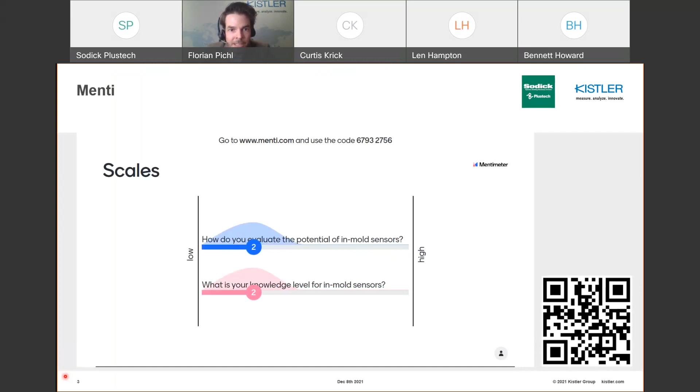Before we start, I would like to have one interaction with you. Here I have a small Menti code. Please scan the QR code and rate. What is your background? How do you evaluate in-mold sensors? Do you think it's useful? Do you think it's not useful? And the second question I would like to have is, what is your knowledge level for in-mold sensors? The easiest way is to take your smartphone, scan the QR code, and then you can easily submit it, or go to menti.com, enter the code 67932756, and then I will get some reply. In the end, I will share the results. This is just for me, to get a feeling if you already got in touch with it or not.

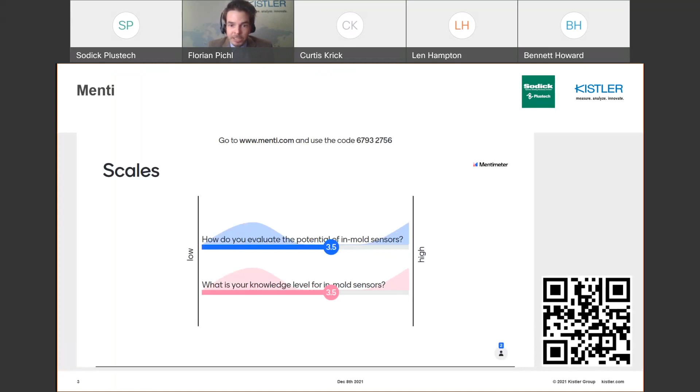So, where to start? We are still in the injection molding process, and I think the majority of you know what the job is. We have some materials, some granulate. We are using process equipment like an injection molding machine. We have different peripherals like cooling, handling, and so on. And we have an injection molding tool. And the primary goal is really to produce parts which fulfill the quality, but also have a very good compromise between production costs and the achieved quality.

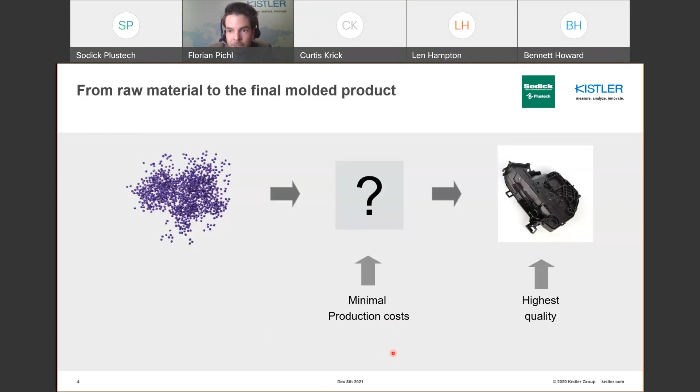In this picture, there are not so many items illustrated, but here you can see different interactions. On the right side, you have your customer. He is requesting the highest possible quality. You are also in contact with your quality department. And in the middle, you have the shop floor, and the shop floor is targeted to keep the production costs very low. This is your internal view.

In the past weeks, months, as well as years, there were also external factors driving your production. I'm currently not 100% sure about North America. Currently in Europe, we are facing a lot of environmental awareness. We have new regulations forcing us to integrate regrind material into the product. That means the process will get a little bit unstable compared to virgin material. If you are an injection molder for medical devices, you have a very regulatory landscape. You have the FDA, you have the new MDR, which is also requesting more documentation, more items.

But you also have some new trends which came up in the last year. That means with digitization, with interconnected devices, you're trying to save money. And this is a really, really challenging environment where you have to compete and have to at least fulfill your business processes. How a process can be monitored can be clearly seen here.

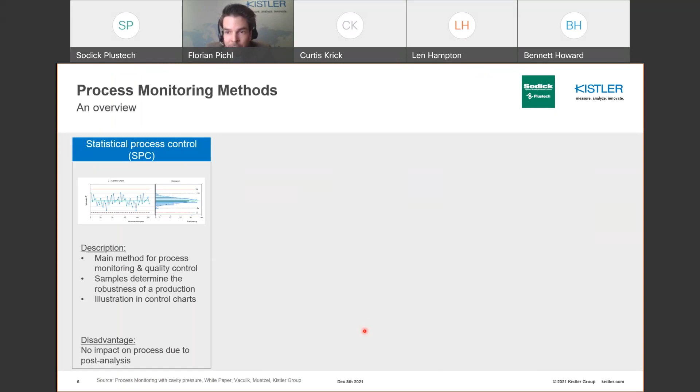Here, I'm collecting 4 different methods for how an injection mold can be monitored. The most classical one is the so-called statistical process control. It's the most common one. You are producing, you are taking out parts, you're doing the measurements, and then you're collecting the data in a control chart. To mention one disadvantage, sometimes it's happening after your production. And if you realize some days after the production, when the mold is dismounted, that you have a very high scrap rate, then you cannot fulfill your customer orders.

Another one, which is also very common, is to monitor specific machine parameters. It's a very common, very classical approach. To mention one disadvantage, you get a lot of information from the machine, from your process, but one item is still missing. It's the information out of the cavity, directly where the part is created. And this is the starting point where I'm jumping in, or different other suppliers.

We have here so-called cavity pressure sensors, which are directly integrated into the mold. You are monitoring the processes, and you get direct information also for high cavity molds. One disadvantage to mention is that you need additional investment for the measuring chain.

Last but not least, this is a combination of machine parameters, process data like cavity pressure, and some mathematics. With the combination and linkage between machine, cavity, as well as quality data, you are creating so-called mathematical process models or quality models. To mention one disadvantage, it takes time, because the basis is a design of experiments which needs to be done. And as you know, having different steps, this takes time, and it's very expensive, but it can be found very often in the medical industry.

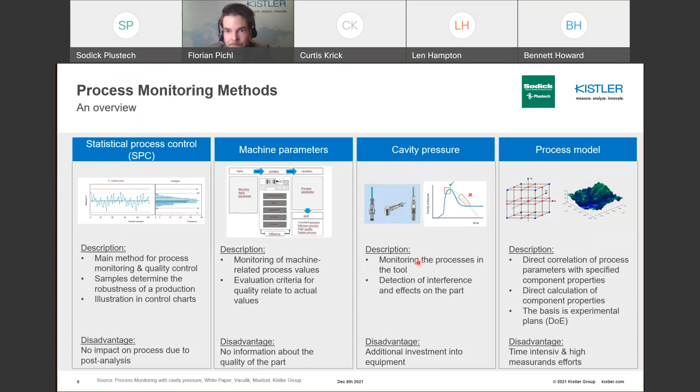In between, you also have to focus on, is my tool capable of producing the parts? And is my process capable of it? Classically, you're not only having one process or process setting, you are having a process window. And with a different process window, you also get the same question about, is my tool capable? Is my process capable? And what will be the resulting outcome?

Another information which can be taken out of this approach is that for each cycle, you can have a look on how balanced is my mold. That means how to answer the question, is my tool capable? Do I have any internal or external effects affecting the molding approach?

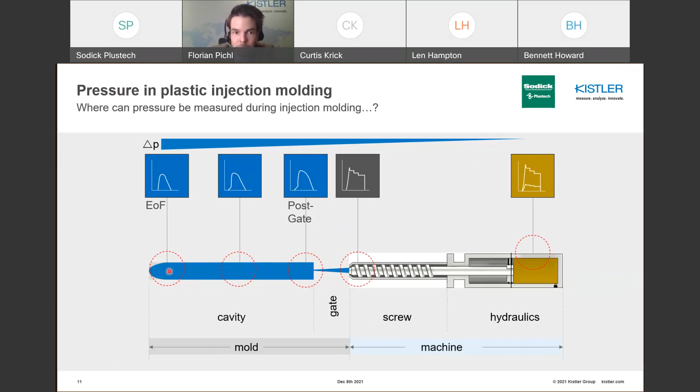When we talk about cavity pressure itself, why is cavity pressure so important?

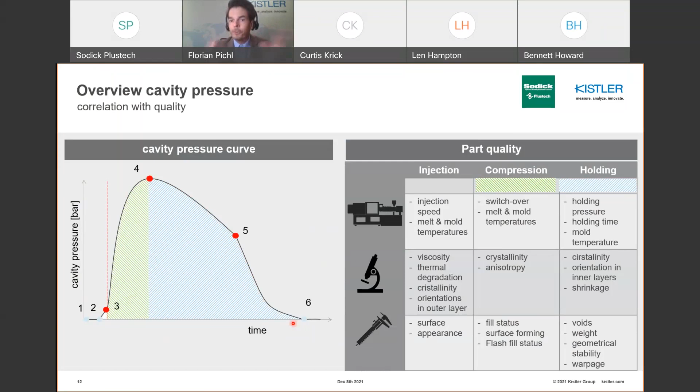This phase is mainly responsible for weight stability and geometrical stability, but also the length of the holding phase will have a direct impact on your part quality, because if you're ejecting the part too warm, you will have some inner tensions, some inhomogeneous cooling, which will finally lead to warpage of your part. This is information you get for your process, but also for your quality.

If I look at the impact of different machine parameters, I think you also know that for an injection molding process, you have different machine parameters like injection speed, temperatures for the hot runner and the mold, different pressure levels, the holding pressure, the back pressure, as well as the temperature for the barrel. And all of these machine parameters can be visualized with cavity pressure. Temperatures change the viscosity, and a change in viscosity will also change the pressure curve. Changes will shift the pressure curves to higher or lower levels.

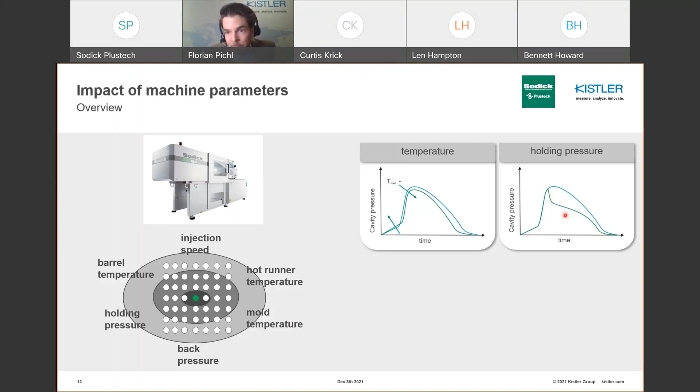Another item which can be made visible is the holding pressure. If you look at both graphs, you see that the blue one has a higher level and the green one a lower level. And if you remember the previous slide, where I stated that the holding phase is responsible for geometrical stability and weight stability, you can assume that the part for the green line will differ compared to the blue one. In the worst case, it's not fulfilling the specifications for weight, and there might also be a high risk of voids in the parts.

Another item is the injection speed. You see here that with higher injection speed, you are filling faster and changing the curve profile. This can be clearly seen. You also see information about an optimal switchover point, which can be derived from this, but you can also get information about the maximum pressure, which can then be correlated with the clamping force and so on.

And last but not least, the last one is the switchover. When you change the injection speed, you should also have a look at the switchover point. If you have a higher injection speed, then you should also adapt the position of the switchover accordingly.

In the worst case, what could happen is that switchover comes too late. Then there might be a risk that you're overpacking the mold, you're damaging the mold. And when the switchover comes too early, then you are not having a full cavity. The holding phase cannot compensate the shrinkage, and you will have some geometrical deviations for the part quality.

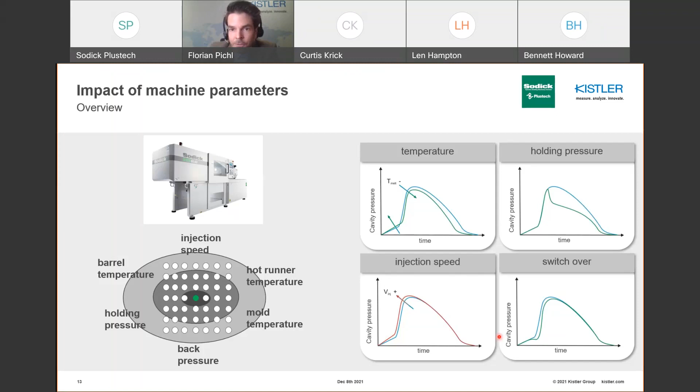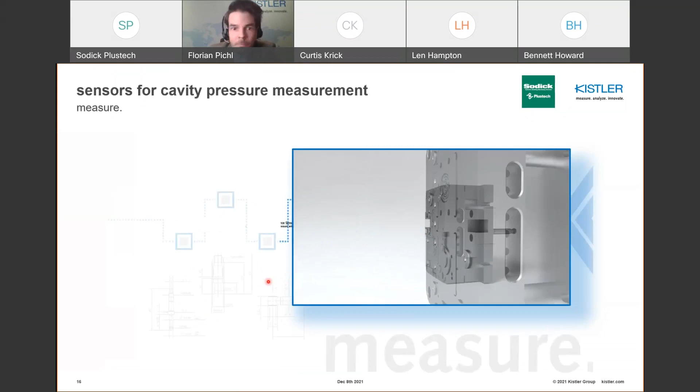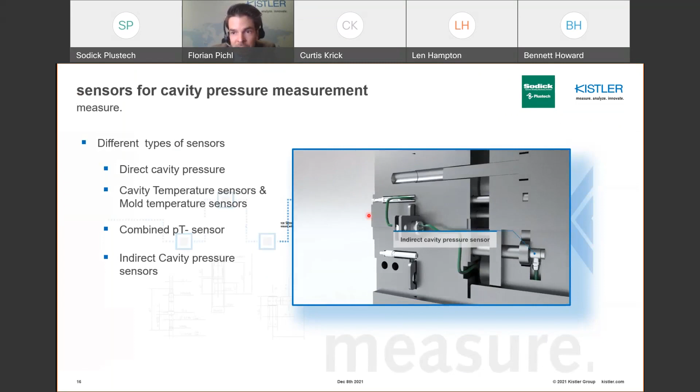Talking about different sensor types, we have direct sensors and indirect sensors. The direct one can measure both pressure and temperature. The indirect sensors can be placed behind an ejector pin. This is one classical, very common approach. But we as Kistler also have a third variant, which is a so-called contact-free measurement. Here you can place the sensor directly behind the cavity wall, which can then be used for optical parts. Over the deflection of the wall, you can measure with the same principle as when you're using a direct cavity pressure sensor.

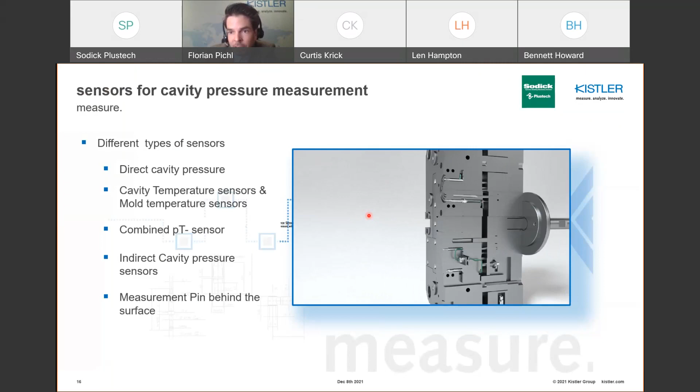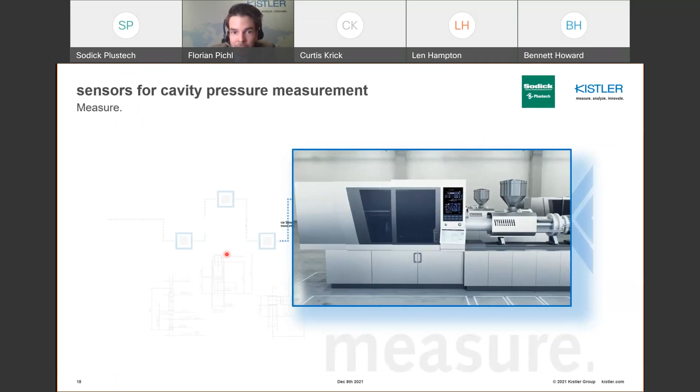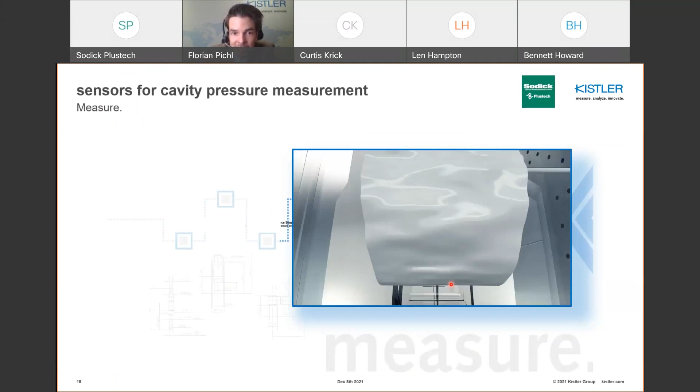Where can cavity pressure sensors be applied? Here I have another video, and this nicely describes what can be seen. You have here the mold in the heart of the injection molding machine. You have a data acquisition system. The melt is entering, the cavity is filled, the transducers are recording it. You have real-time monitoring of the in-mold cavity pressure, and can directly derive information about what's happening directly in the mold.

One of the benefits is really that it's not R&D anymore. It's really common in serial production. You can get 100% process monitoring, and you can easily get the data for the machine with a charge amplifier or appropriate process monitoring devices, which is illustrated here. And here you have our process monitoring device, the so-called ComoNeo.

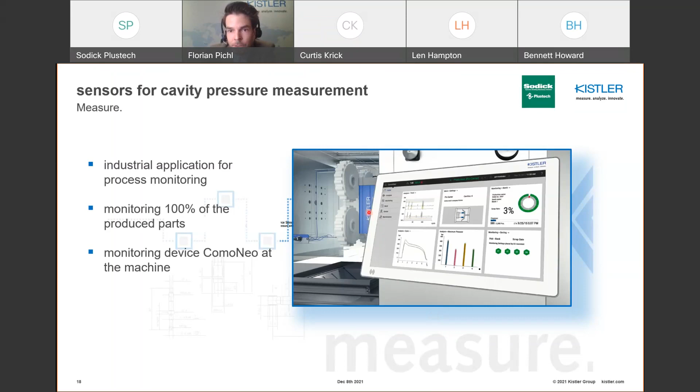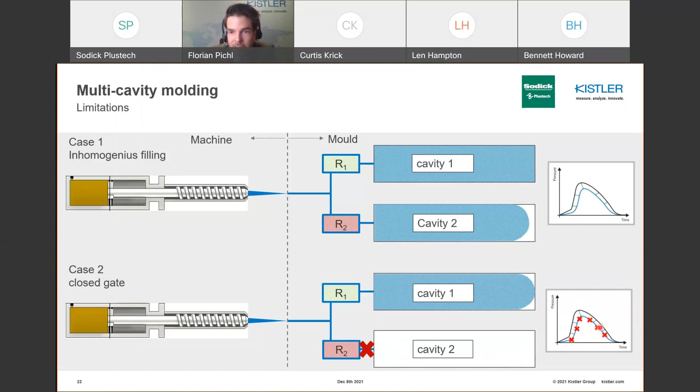This is one approach, but there are also tools on the market where you can use the different information and the review information: what needs to be done if you have to change the steel again. For example, we also have one software which is calculating, based on the recorded data, what needs to be done, and this can be directly matched with the part quality.

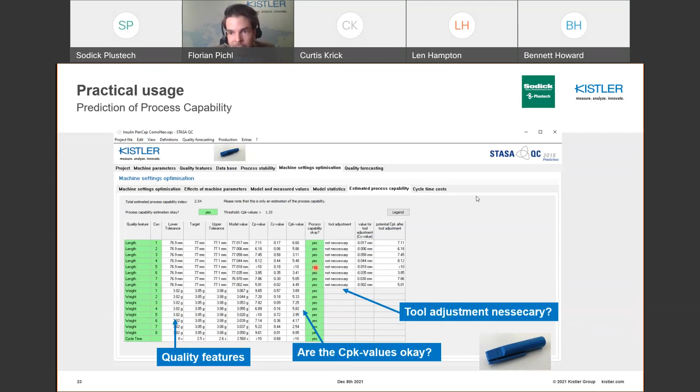What you can see here is a tool capability run. We recorded the quality attributes, we recorded the machine process data, we measured the data, and based on the created data, we could give an estimation which cavity needs to be improved to have a stable mold for your final production.

How can it be used for process baselining or reference curves? This is the next item. This is one practical showcase on the right side right now. You can imagine that if you have a mold maker or a different supplier who is setting up the process, the mold at plant number A, he's using a different machine, different settings. And then you are relocating the mold to your final production plant. You are not having the same machine, or even if you have the same machine, you will have some deviations.

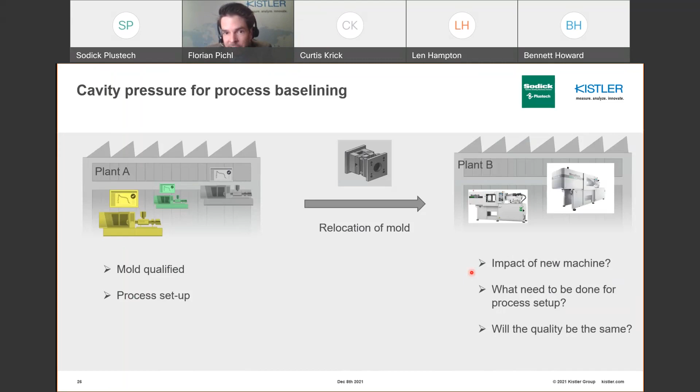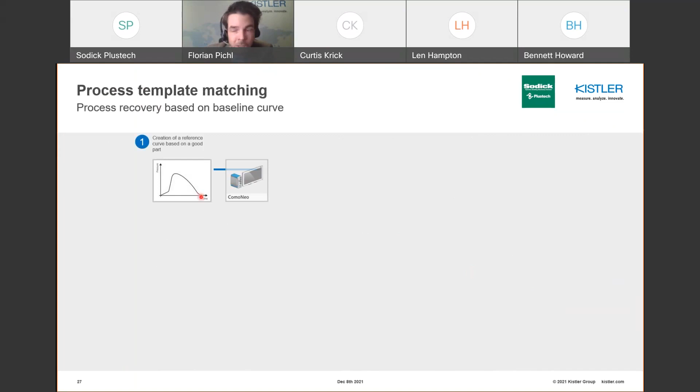The big challenge here is really what needs to be done to find a stable process again. And here cavity pressure can be used to come back to your process settings quite easily. And this is done like this. At plant A, you have recorded your reference curve, your process is stable, the parts are okay. You are recording here the reference curve, the cavity pressure curve. You're transferring the mold, you're recording on the new machine. You can see deviations coming. The root causes can be various: machine, different geometries, temperatures. But with the help of the cavity pressure curve, you can take this curve and transfer the process quite easily.

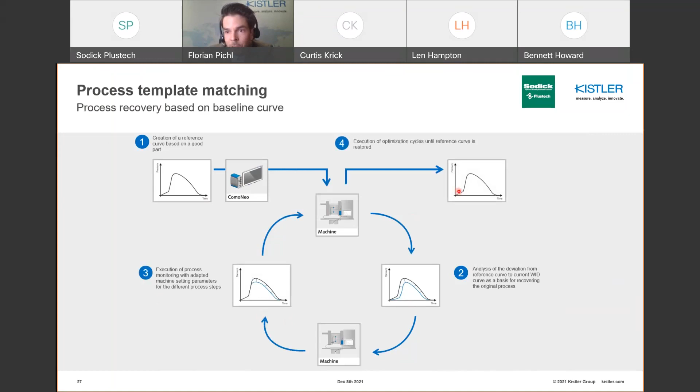How is this done? You analyze each phase of your injection molding cycle. You have a look at the injection phase. You're adjusting the injection speed. You're adjusting the switchover point. You have a look at the set holding pressure, back pressure, end time. And your approach will be done iteratively to find and to match the curve over the different cycles. And you will achieve this curve after different steps. And your goal is that at the new plant, at the new machine, the cavity pressure curve will be on the same level like you have created at the different supplier at the different location.

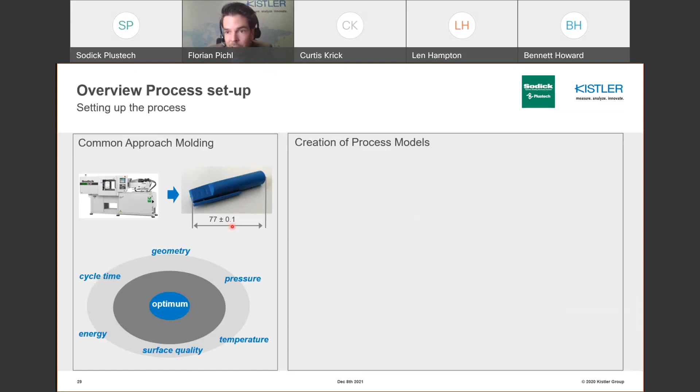How to use cavity pressure for the process development and optimal working point. The classical common approach, which is common, is to do it trial and error. You get the machine, you set it up, you use the different machine properties, set it up, and then find a stable process. A different approach can be done with so-called process models.

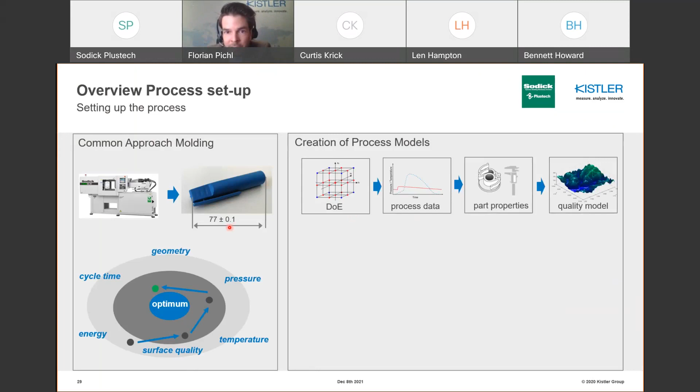Here you are using design of experiments. You are fully analyzing the process room with the help of the cavity pressure sensors. You're collecting the data. You are collecting the part properties, creating the quality model. And with the help of this, you can create neural networks, and this can be then finally used for the optimum working point. This is the same picture from the previous slide. Imagine if you change injection speed, switchover point, all the different elements I have recorded here for one setting can be made visible.

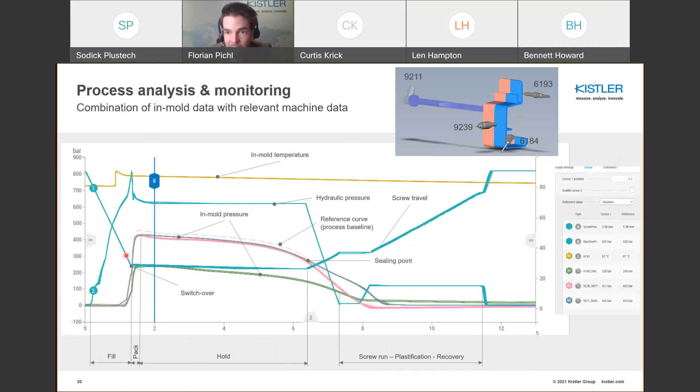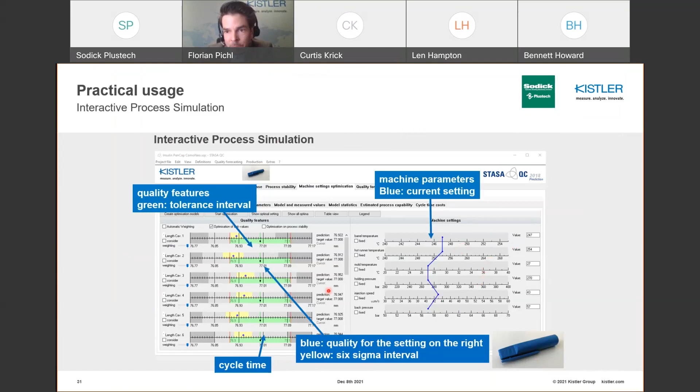When I'm talking about the working point, you have the potential to use statistical models where you can run simulations. On the right, you can use the set machine parameters. You can change the set parameters, and with the correlated and derived information, you can estimate what might be the impact on my part quality on the left.

For example, here I changed the holding pressure. And if you look at the points with higher holding pressure, you have a higher compensation of the volumetric shrinkage, and you will have a more or less stable process, which is then resulting in stable part quality.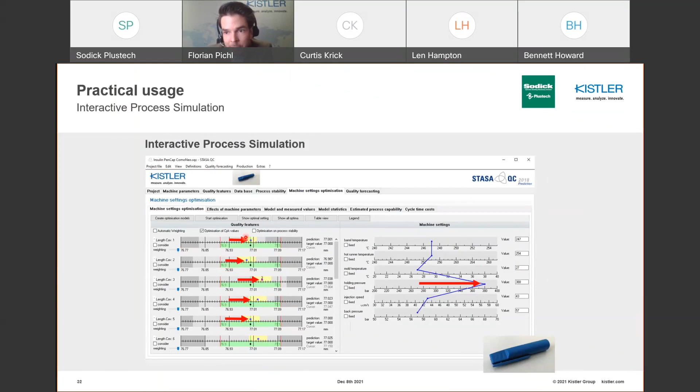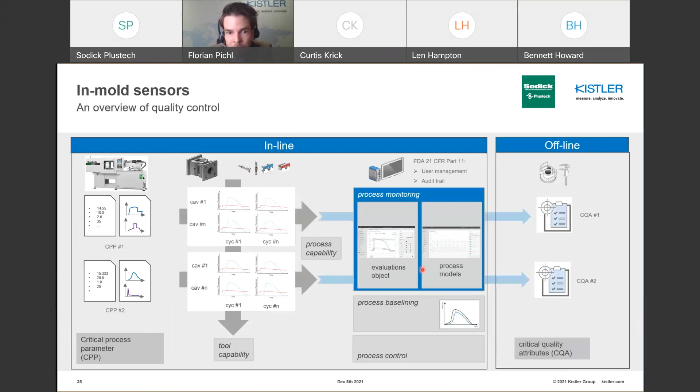How can it be used for process monitoring? This is a different approach. Here you can use different evaluation objects, envelope curves, as well as process models. The video nicely illustrates how it is applied. You see here the recording of the cavity pressure curve.

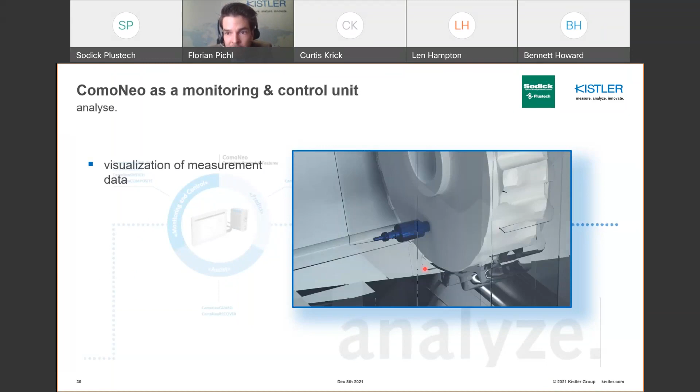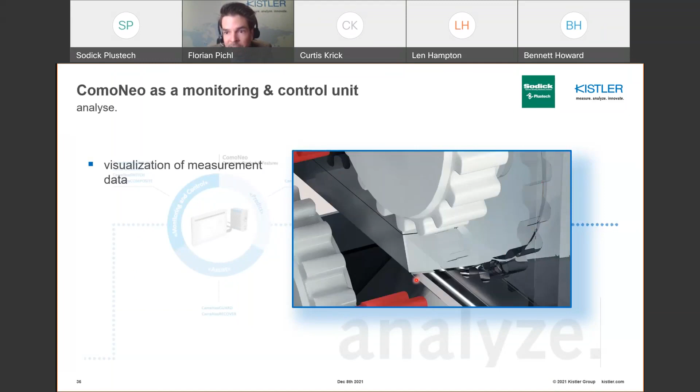Systems are monitoring the cavity pressure directly in the process, in the cycle, with these boxes. And with the height and the adjustment of the boxes, you get the information if my part is stable or not. Here you have one example where 2 cavities were not reaching the allowed pressure level, and a sophisticated monitoring device automatically gives a signal to the machine so that the parts will be automatically separated and scrapped.

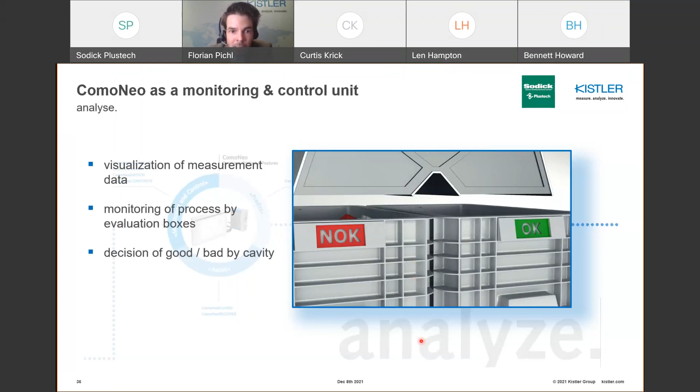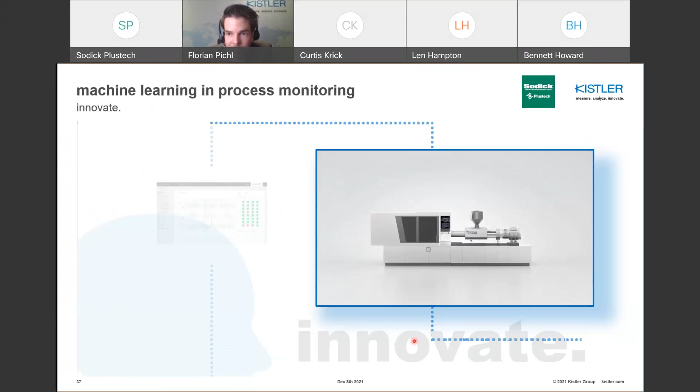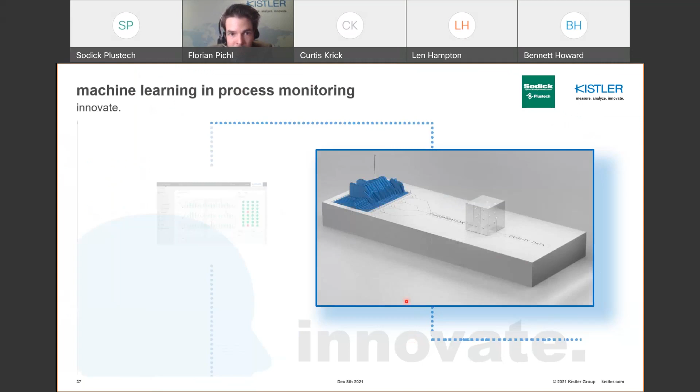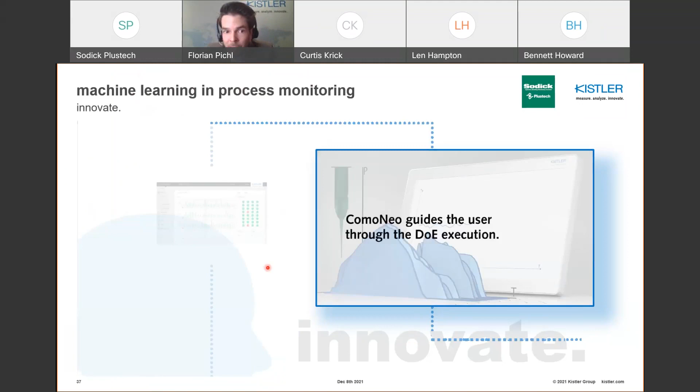Another item which I would like to introduce, and this is a little bit referring to the title, How to Drive Innovation. And this can be seen here with process models. You can integrate this sophisticated process data into machine learning. You can create process models with different heights and values. You can record it. Each of the different cavity pressure curves has an impact on the part quality. This can also be directly done with the process monitoring devices.

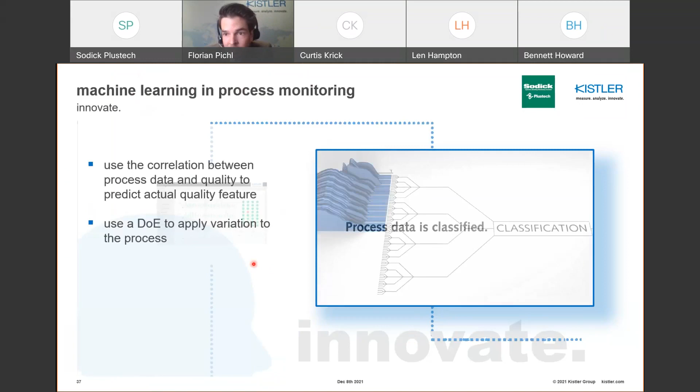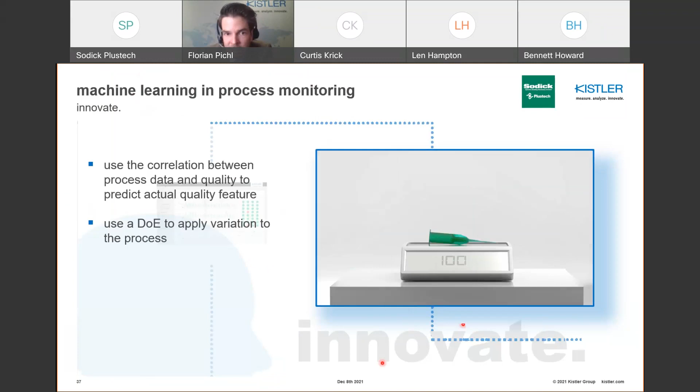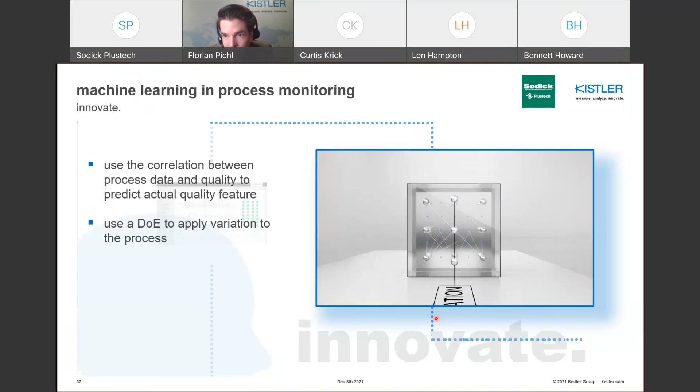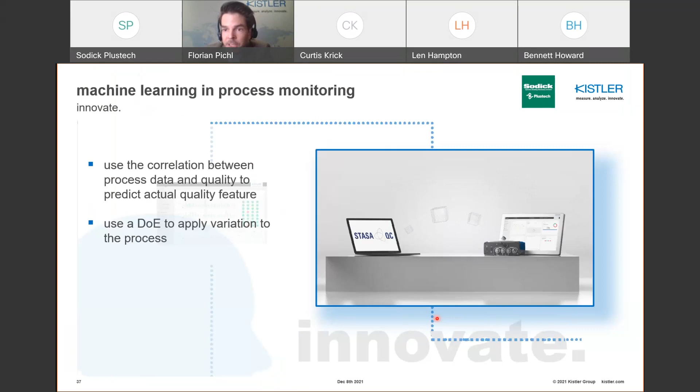In real time, processes are classified afterwards because you're doing the measurement for each cycle, for each DOE. You're measuring the items, and then you're creating the mathematical models. And with the help of the classification, you are really capable of driving innovation at your shop floor, because with this information you can generate prediction models based on artificial neural networks, and this helps you to do simulations, to do process analysis, but also to improve the process with this optimized database.

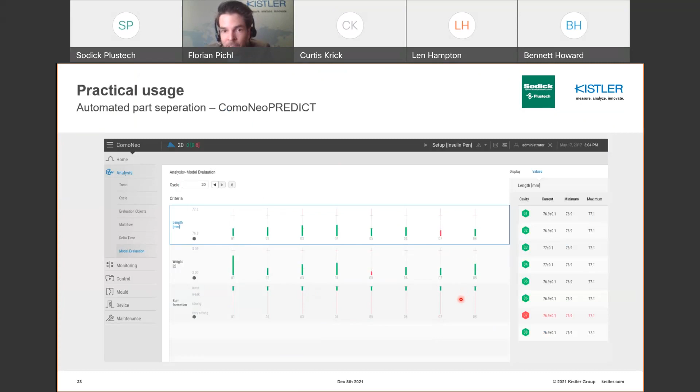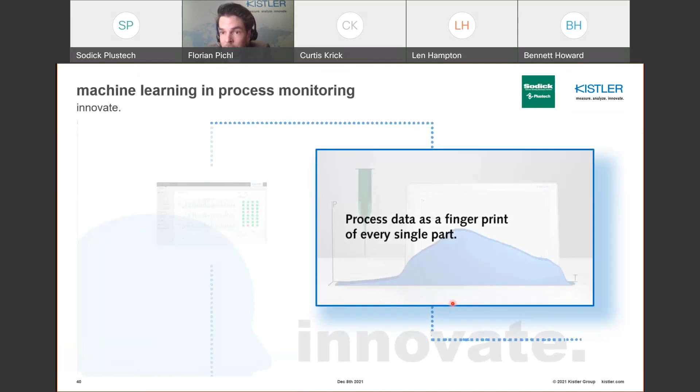In real time, this would be the graphical user interface for our device. Here we have different part qualities, and what can be derived right now. You're not getting only the information if the part is good or bad, but you also get a quality documentation. And the quality documentation can then finally be used for batch release, your supplier or customer documentation.

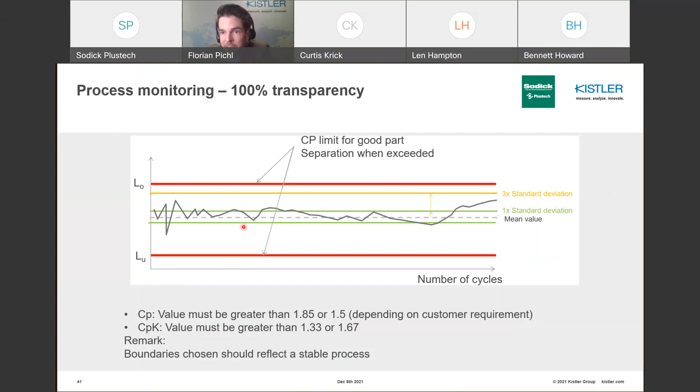All the data that we are generating with cavity pressure are stored. You are not only doing a cycle view, you can get information over your whole production time. That means, for example, if you have a night shift and you don't know what happened in the night shift, have a look in your historical data, have a look at the different phases, and you can clearly see if something went wrong, something was changed. And this is really reducing the risk that bad parts will be sent to the final customer.

Another item is a little bit talking about material efficiency. When you do the process monitoring, you have the analysis, you can detect variations in material, in process, in temperatures, in human handling. You can analyze this, you can detect it, and in combination with process control, you can also derive material efficiency. Because how is material efficiency defined? On the one hand, it's a reduction of scrap. On the other, it's an incorporation of used material.

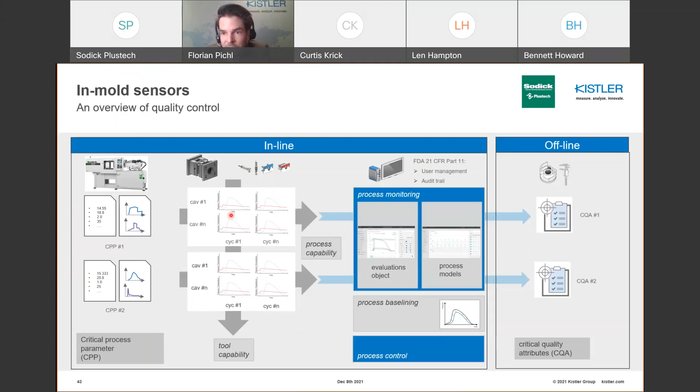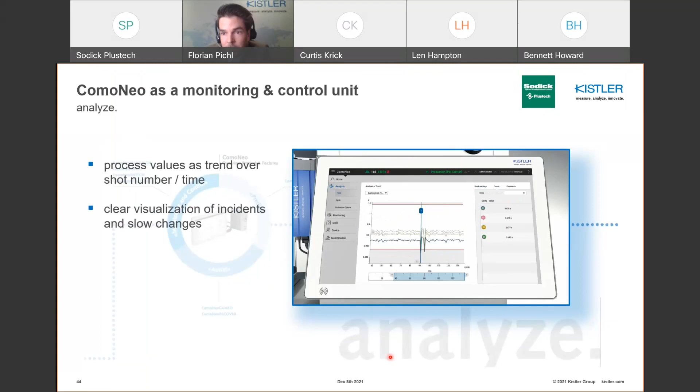And with the combination of advanced monitoring devices, in-mold data, and machine data, you're capable of addressing this question quite easily. How is this done? It can be seen in this video. You're monitoring the deviations right now. Changes in material and the process can be detected automatically. That means your shop floor can take actions right now, but you also have the chance that parts will be automatically separated if parts are not in the defined range and in the specification.

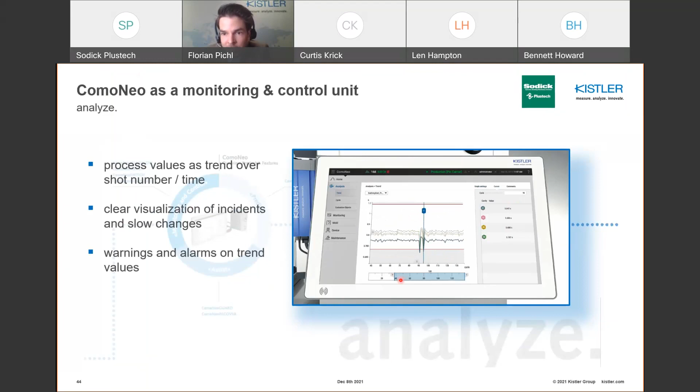And this is then also the starting point talking about the control. Here I would like to have a short view on the switchover control based on cavity pressure. Each machine is really capable of doing the switchover individually, but this is classically done by screw travel. But imagine if you have the information from each cavity and you know that you would like to do the switchover at a certain pressure level, why not use the in-mold data to send it back to the machine, so that at a certain pressure level, which should be reached for each cavity, the machine will automatically do the switchover. And this is again illustrated here.

This is also the picture that I showed initially. Case number 1, you have a slight deviation. You can imagine that the pressure level is on the same level. You can easily apply a pressure threshold, so that if you reach this pressure threshold at cavity number 1, do the switchover, or you can also generate a forced switchover if the cavity is full.

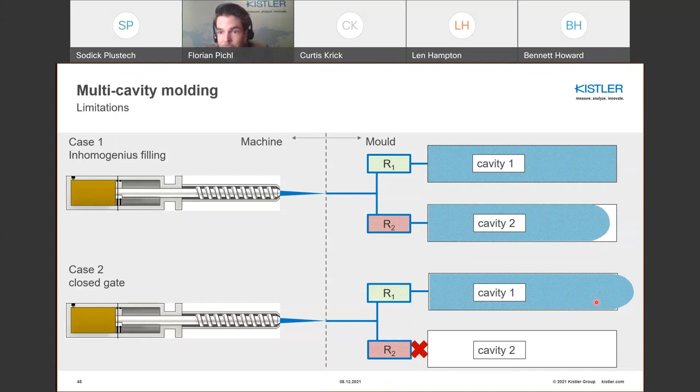This is really the benefit of protecting the mold. By protecting the mold, in case number 2, this can be seen quite easily. Gate number 2 is broken, no melt is entering. In the worst case, you're overpacking cavity number 1, you're generating flashes, you're generating plastic deformation of the steel, and this is really not wished.

How can this be applied? Like here, I mentioned pressure level. Here I have different application examples of how it can be applied. For a 4-cavity mold, you can easily execute the switchover based on cavity pressure by one single channel, all channels, or a combination. The combination you have seen in previous slides, where you know at which cavity the pressure is reached latest, but you also have the combination with enforced trigger when you apply the cavity pressure approach for the cavity where there is a high risk of overpacking.

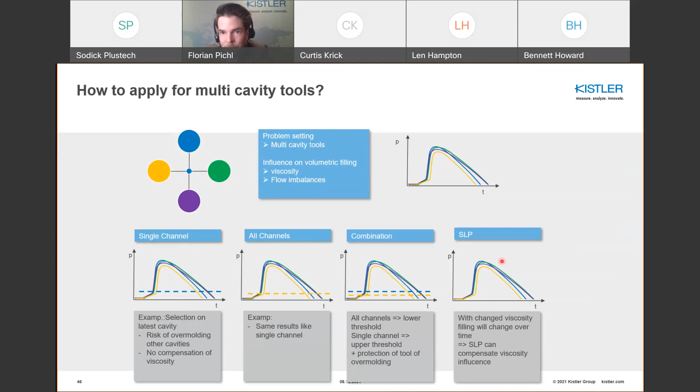You also have automatic algorithm controls, which can be found on the machines or in sophisticated process monitoring devices. And with a combination of this, you can also generate some benefits. Here we also have some trials. This was one of our bachelor theses. We investigated the impact of different switchover procedures. Here on the left, you have the machine. Then we are using the so-called SLP, and the cavity pressure switchover threshold.

And you can clearly see that the cavity pressure is one item for process monitoring. But if you look at the switchover volume, which is this one, with the cavity pressure you see that the switchover volume was much higher compared to the previous one. This is one view. What is the impact on my process, or on my part quality? This can be seen here right now.

The red one is my weight and the blue one is my shrinkage. And with a more focused cavity pressure threshold, you can bring your weight stability to a higher level, as well as shift shrinkage to higher levels when you use in-mold data.

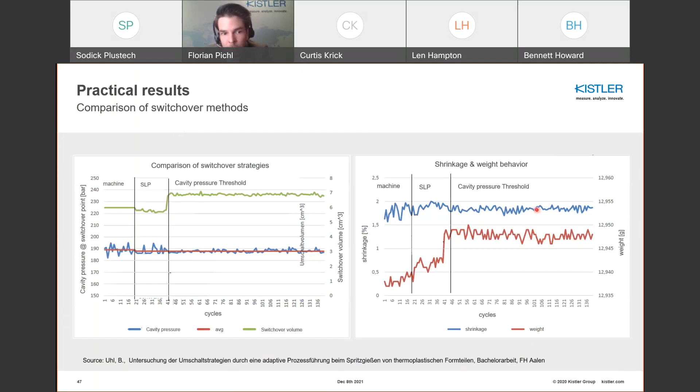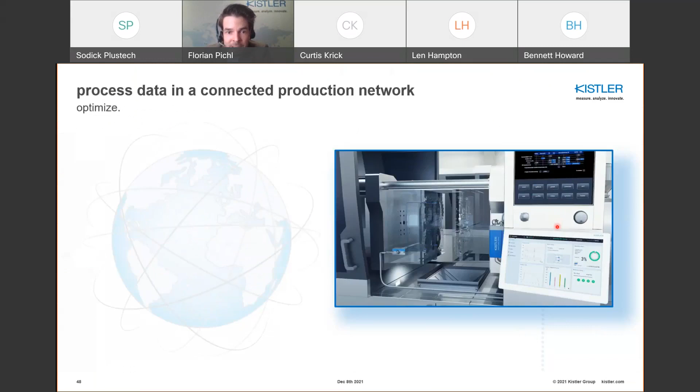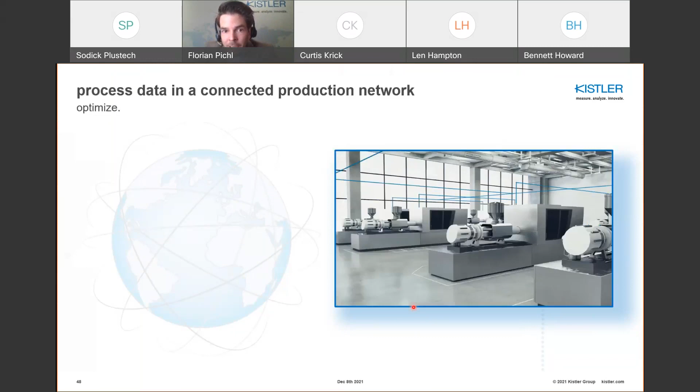It's not only about process control. You can also derive information from your whole production plant. This is seen here in my last video. We are not only collecting the data; the collected data can then finally be transferred to a third-party product like an MES, data storage, or a data lake. You can easily access the information. You can run predictions. You can run production planning approaches, but you can also derive information about different machines and different locations quite easily when you use all of the data for your production plant monitoring.

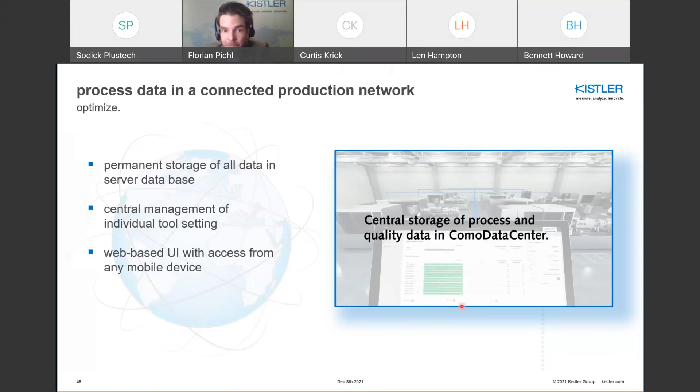That's from my side. Let's come to the last page, a short summary. What have you seen? You saw different applications and application examples for monitoring with piezoelectric sensors. You saw different sensor types. You saw how a sensor is instrumented or installed. You got a little bit of a feeling for the cable and connection technology. Then you have information about the monitoring device. You get a lot of information for your process.

You can do real-time process monitoring. You can do good/bad part separation. You get alarms. You can make everything transparent and control your production shop floor. You can also drive innovation with it. You can analyze the process with a holistic approach with design of experiments. You can use the sensor data for artificial intelligence, driving efficiency increases.

But you also have a permanent database, because the data are not senseless. You can store the data for your quality documentation, for your regulatory compliance, for whatever else you want. You can store the data or send it directly to an MES or different storage, and you can access the data everywhere, whenever you want.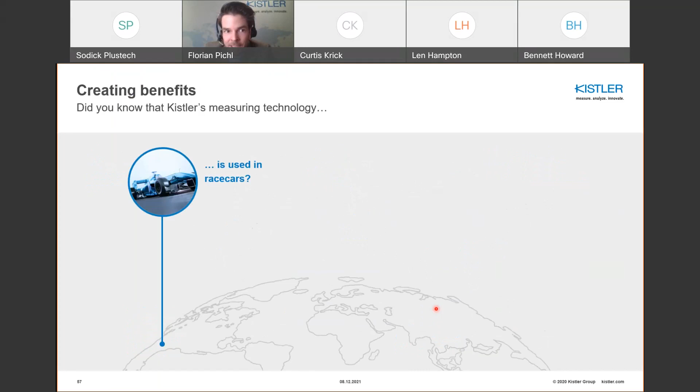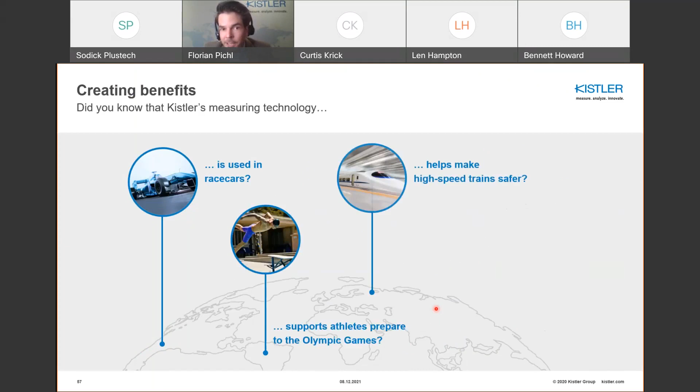Who is Kistler itself? So I'm coming from the plastics industry, but Kistler is not only plastic. You can find Kistler in race cars. You can find our sensor technology supporting professional sports like Olympic swim teams, athletic teams. You can find us making high-speed trains safer. For example, we created a crash wall for trains in China. And as you have seen, we also guarantee high production efficiency and transparency with an application of in-mold sensors in the injection molding process.

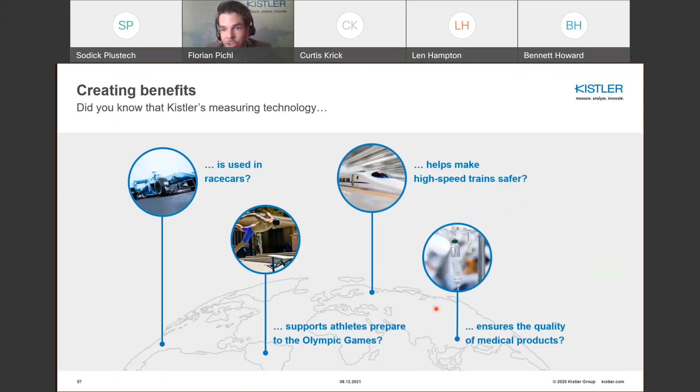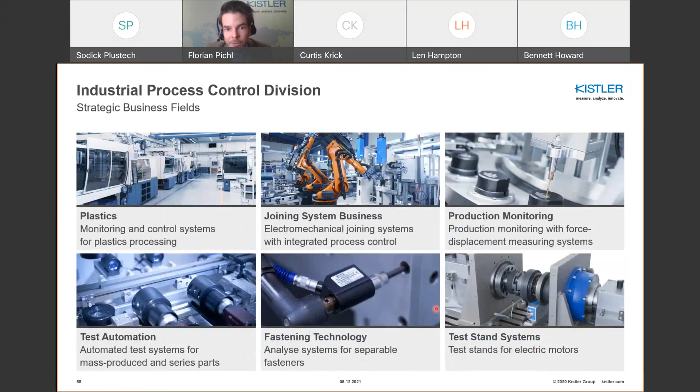Who are we as well? I'm coming from plastic, but as mentioned earlier, we're not only having plastic, we're also having different industries, which can be seen here. We have assembly and testing represented by joining. We have production monitoring for assembly steps and test approaches. We have vision control, we have fastening technology, and we are also producing test stands for different monitoring approaches.